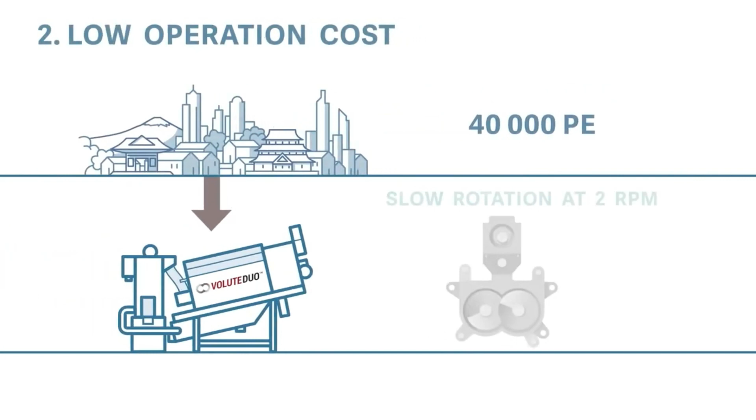Volute consumes the same amount of energy when dewatering sludge from a 40,000 population equivalent wastewater treatment plant as your kettle.

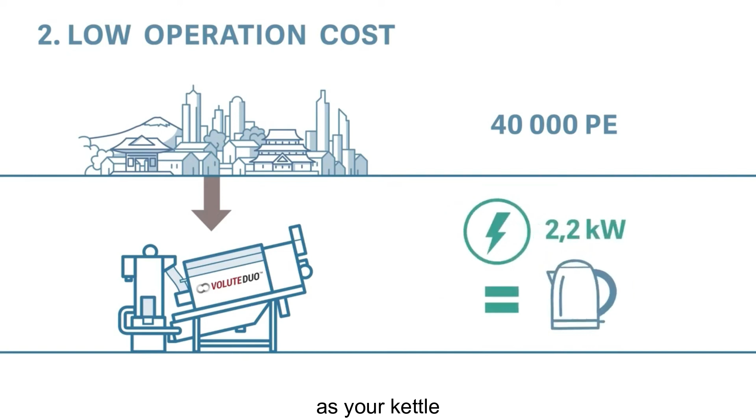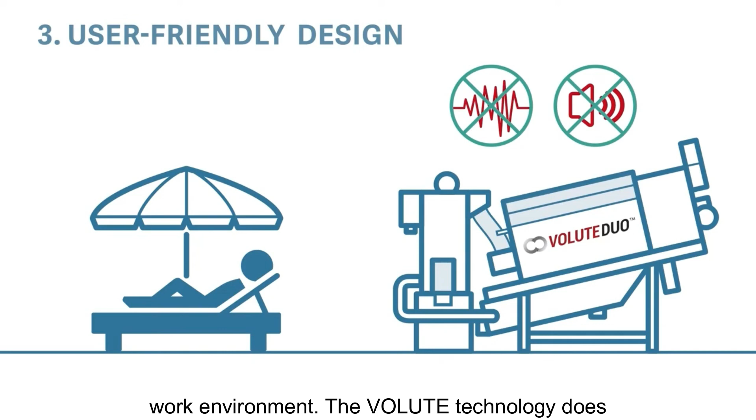A slowly rotating mechanism within the cylinder decreases the noise and vibration levels to a minimum, ensuring a comfortable work environment. The Volute technology does not need any foundations.

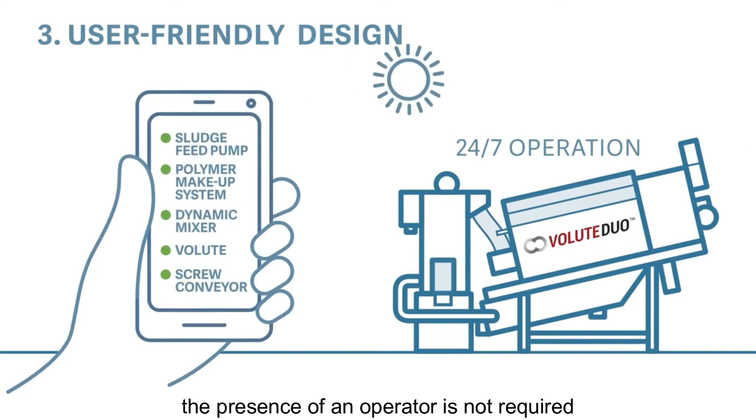Volute is designed for 24/7 operation. The presence of an operator is not required. Furthermore, the advanced technology can be adapted to a remote control and monitoring system so that the operator can check and control the operation of the entire system from anywhere.

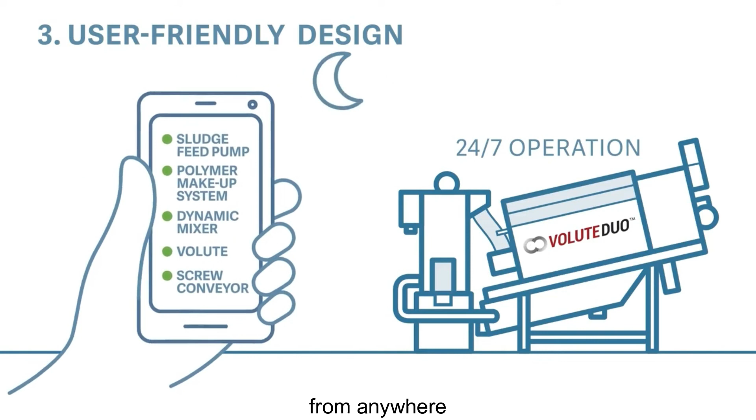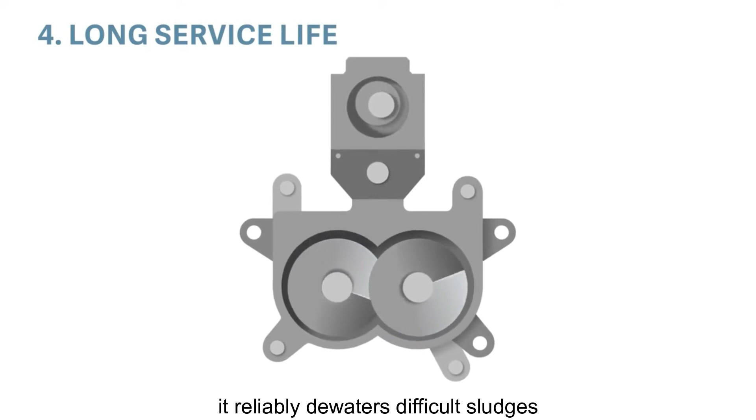Volute technology, namely Volute Duo, provides significantly longer service life thanks to its contactless design. It reliably dewaters difficult sludges with high fiber and inorganic content.

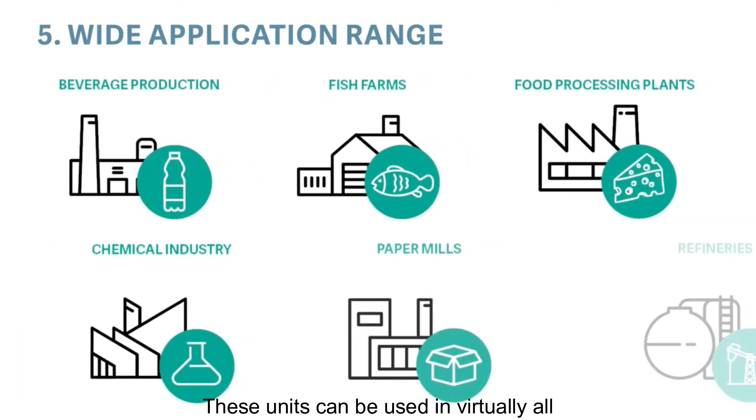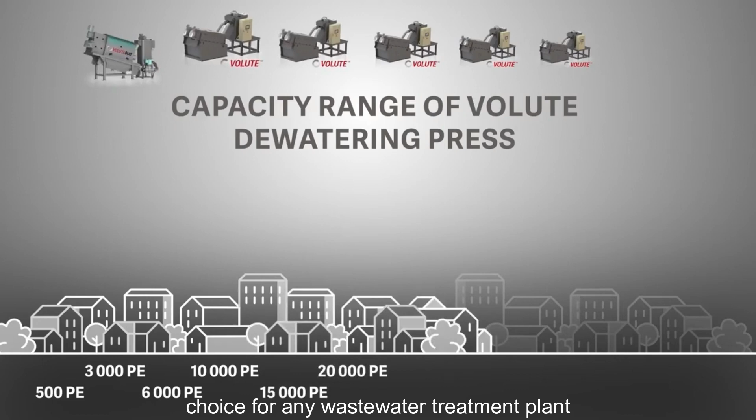The wide application range is another benefit of Volute and Volute Duo. These units can be used in virtually all municipal and industrial applications. Volute has a wide range of product lines, so there is no oversized or undersized choice for any wastewater treatment plant, small or large.

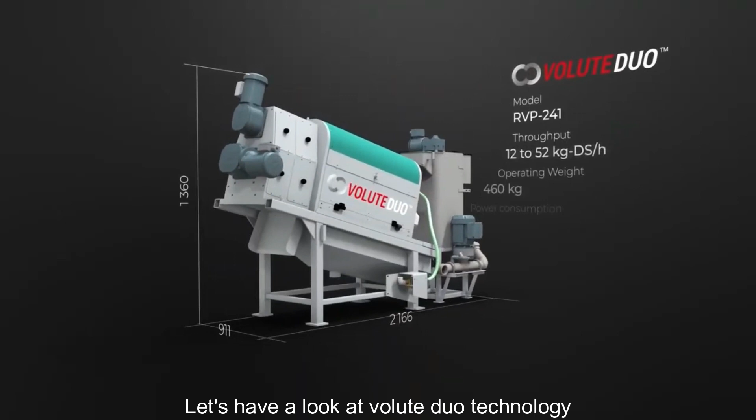Let's have a look at Volute Duo technology. The smallest of this product line, the RVP241 model, can process 12 to 52 kilograms of dry solids per hour.

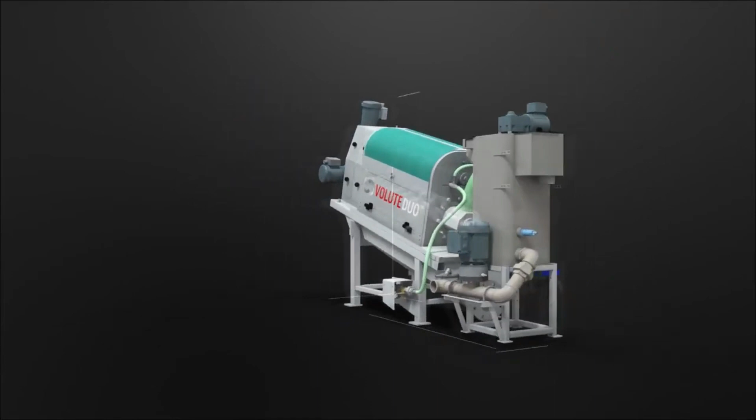Volute Duo introduces the concept of 2 counter-rotating screws in a single filter drum. The screws break up and expose the sludge for thickening and dewatering in a single compact operation.

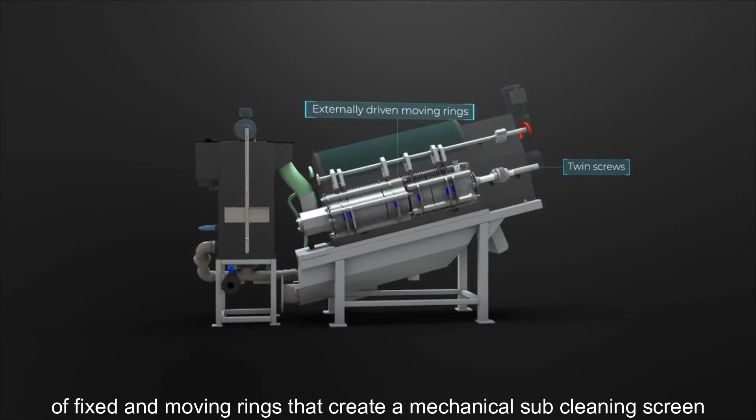The filter drum is constructed of a series of fixed and moving rings that create a mechanical self-cleaning screen to clear the fine gaps between the rings.

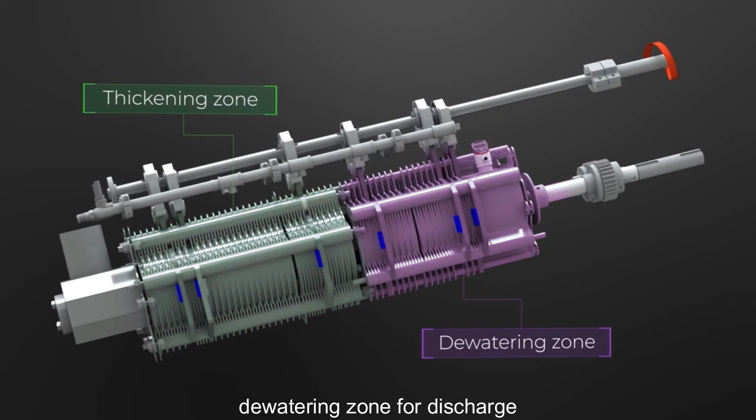The cylinder consists of 2 parts, a thickening and a dewatering zone. The low-speed rotating screws economically transfer the sludge through the filter drum, while the sludge is continuously compressed as it travels through a thickening and then dewatering zone for discharge. The filtrate easily leaves the filter drum.

Now, let's take a look at the sludge dewatering process flow from A to Z.

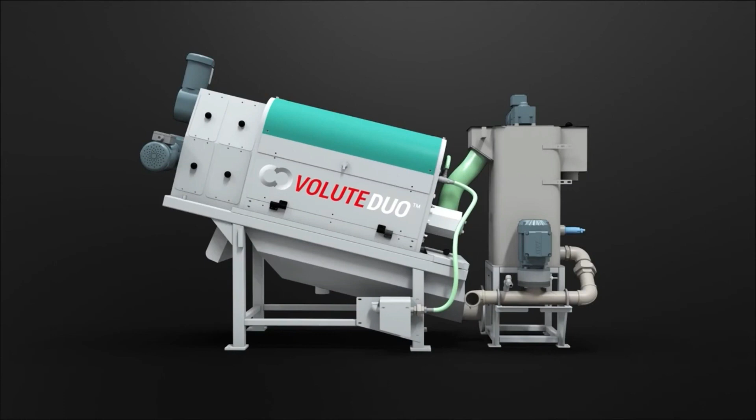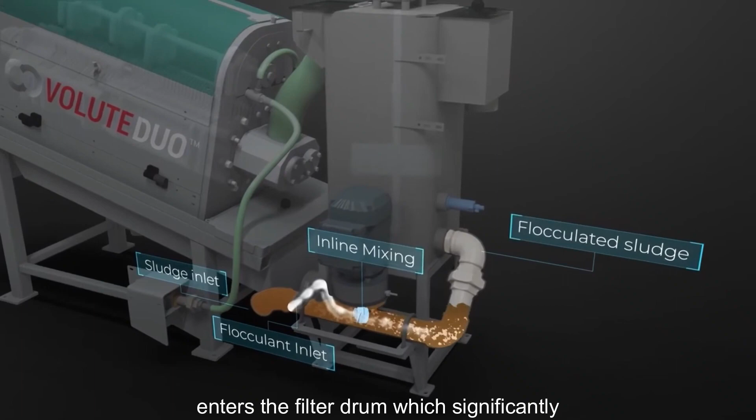The Volute Duo introduces an inline mixer to rapidly mix a flocculant and the inlet sludge before it enters the filter drum, which significantly improves flocculation quality and can reduce the polymer dosage by up to 20%.

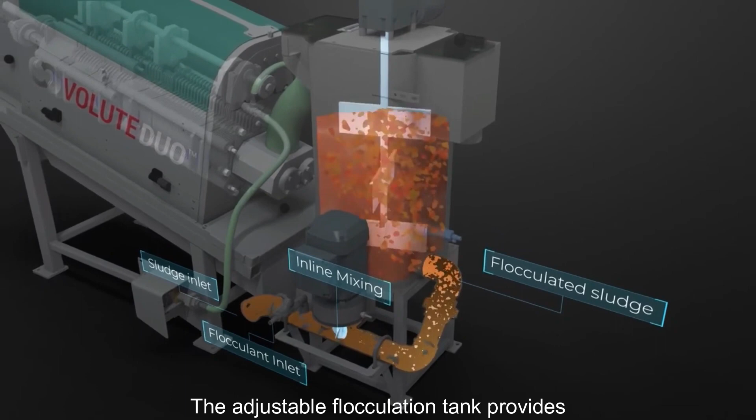The adjustable flocculation tank provides sufficient maturation time for flocculation process completion. Well-flocculated sludge is carried forward to the filter drum.

2 counter-rotating screws inside the cylinder constantly push the sludge forward in the direction of the end plate for discharge.

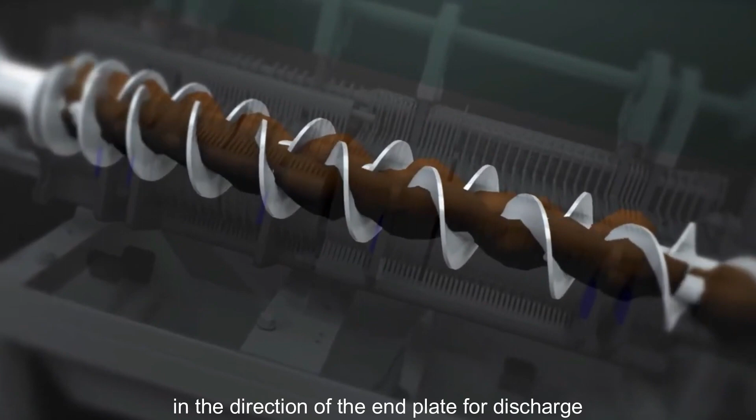Because the moving rings are no longer in contact with the screw flights, thanks to the externally driven shaft, wear is dramatically reduced. The excess solids that can remain on the cylinder surface are washed off at regular intervals.

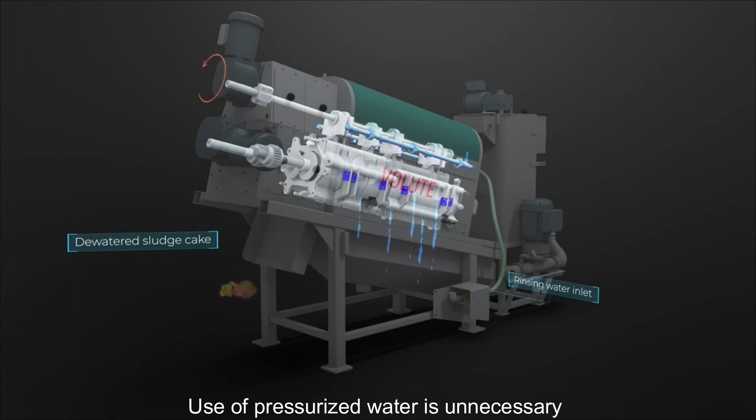The use of pressurized water is unnecessary, as standard tap water pressure is sufficient.

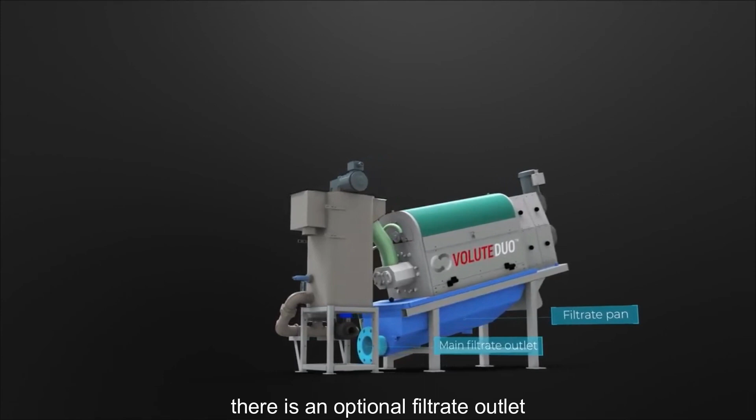In addition to the main filtrate outlet, there is an optional filtrate outlet separating the dewatering zone filtrate from the high quality filtrate coming from the thickening zone.

The Volute technology has been adopted globally and managed to disrupt the status quo of limited options and the complexity of sludge dewatering.

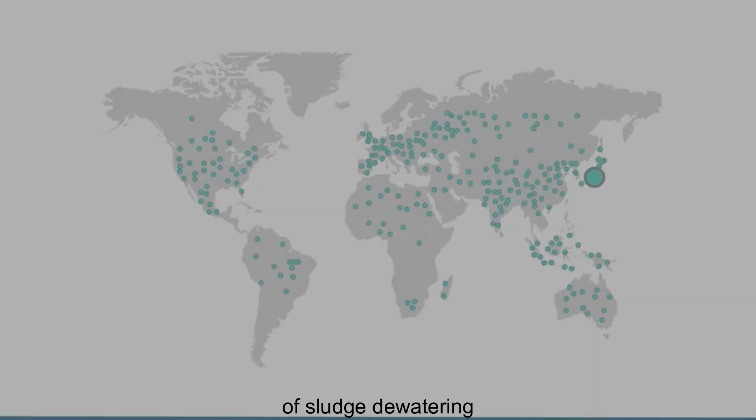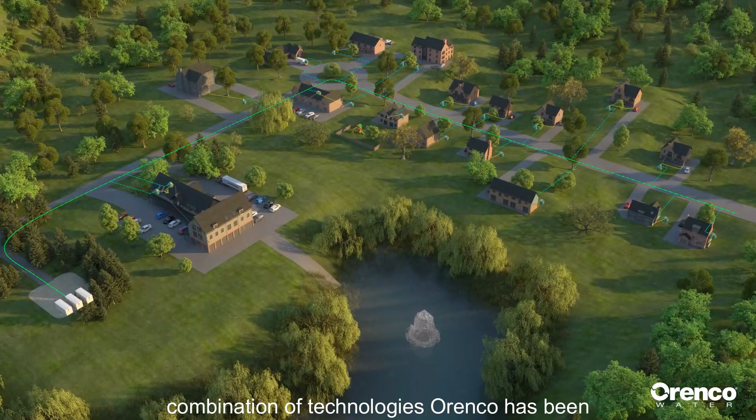Choosing a sewer system is one of the most important decisions a community can make. It's a decision that will affect the community for decades. The Prelos liquid-only sewer system is the culmination of technologies Orenco has been developing and refining since 1981.

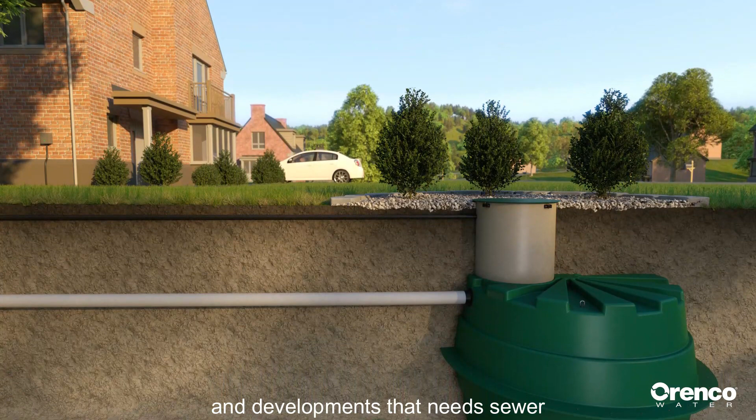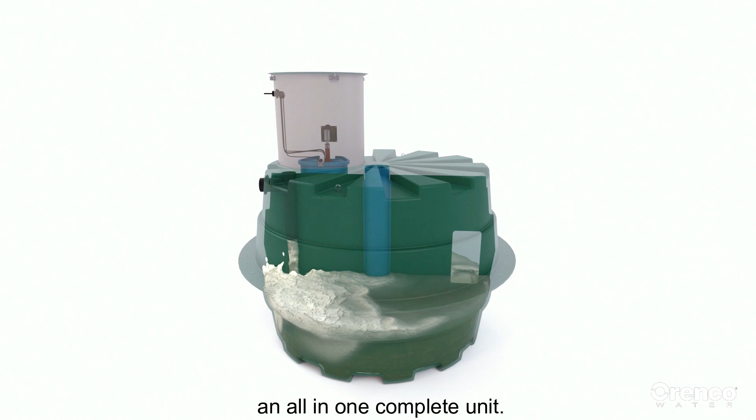Prelos provides an efficient, affordable, and sustainable solution for communities and developments that need sewer infrastructure, whether it's new, an expansion, a repair, or a replacement system. The core of the system is the Prelos processor, an all-in-one complete unit that's easy to specify and install.

It provides primary wastewater treatment and breaks down solids at the source, then pumps liquids to the wastewater plant for final treatment. The 1,000-gallon Prelos processor provides 1 to 4 days of emergency storage capacity.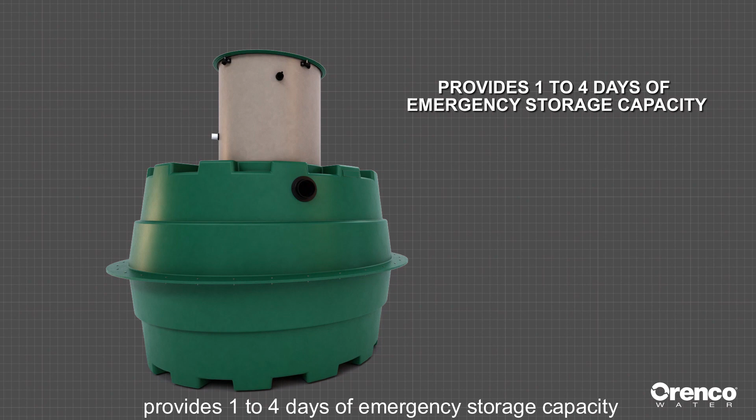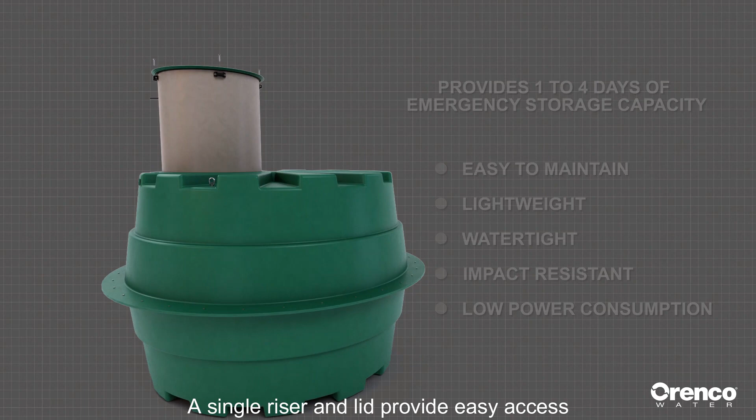It's engineered to be easy to maintain, lightweight, watertight, and impact-resistant, with low power consumption. A single riser and lid provide easy access from the surface to all the components, making it simple to maintain with basic tools and equipment.

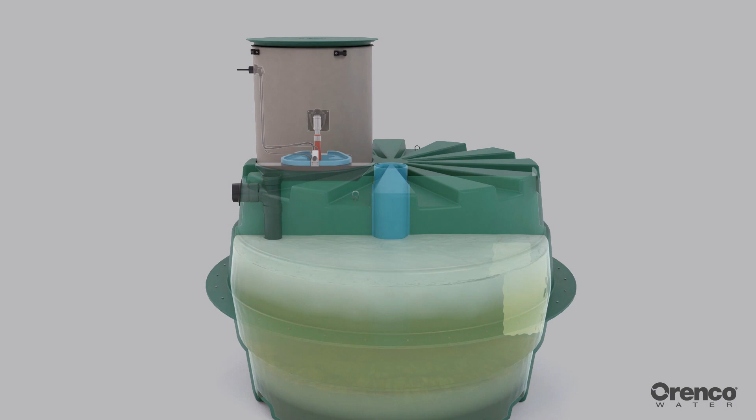Based on decades of proven sewer solutions, the patented Prelos processor tank stores and passively treats solid waste, reducing the volume of biosolids and final treatment costs.

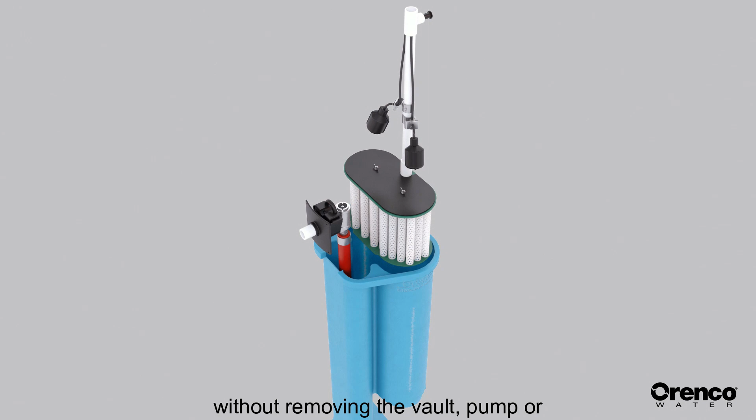Prelos has a passively self-cleaning pump vault with a filter that can be accessed without removing the vault, pump, or discharge assembly, simplifying operation and maintenance while reducing costs.

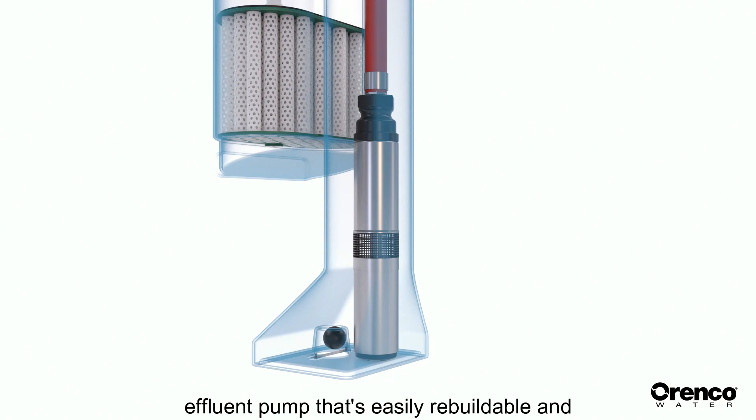The processor also includes a lightweight effluent pump that's easily rebuildable and can last 25 years or more. Orenco's click-tight wiring connection system easily connects the pumps and controls and offers simple serviceability.

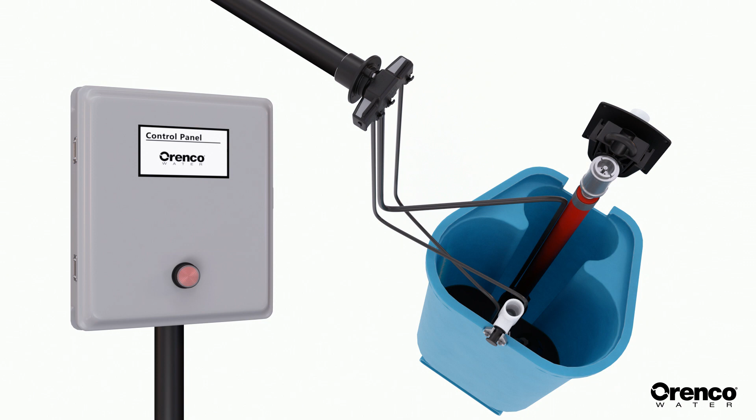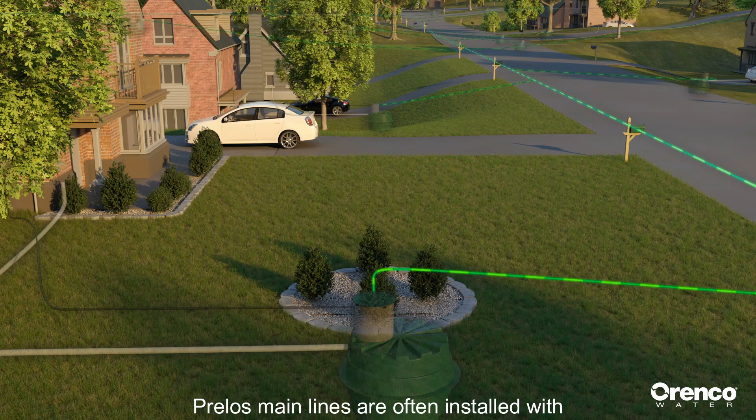The Prelos sewer system uses small-diameter, pressurized, shallow-buried pipes that follow the contour of the land. Prelos main lines are often installed with directional boring, which doesn't require trenching. These main lines can be installed with minimal disturbance to the ecosystem and without disrupting existing businesses, roads, and utilities.

The cost to make Prelos sewer main lines available for connections can be up to 90% less than the cost of gravity sewer main lines.

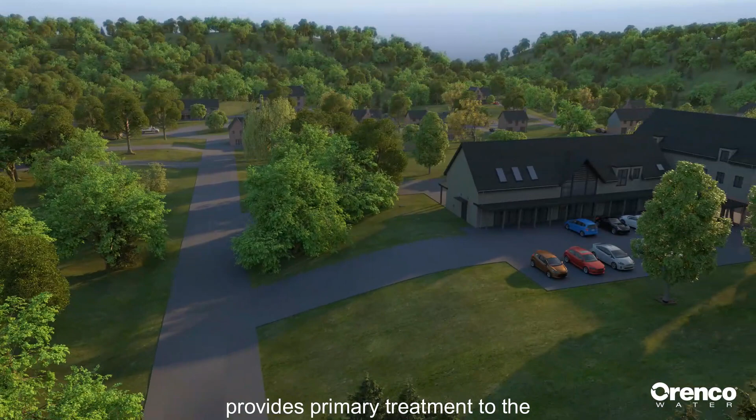Prelos reduces the life cycle costs of wastewater treatment systems because it provides primary treatment to the processor. And while it can be used with any wastewater treatment plant, Prelos works especially well with modular, decentralized treatment plants that can be located at any point in the collection system.

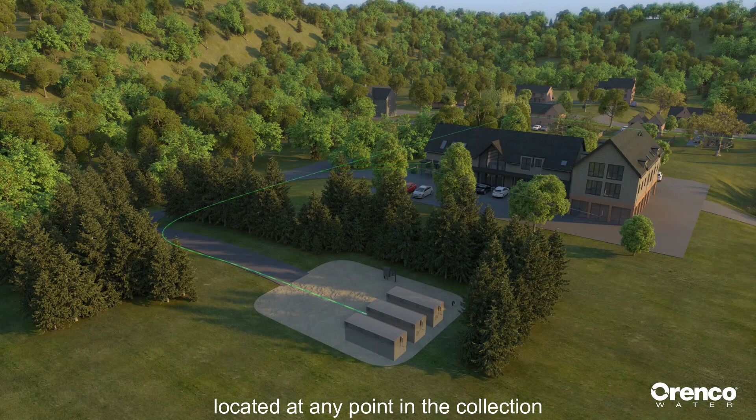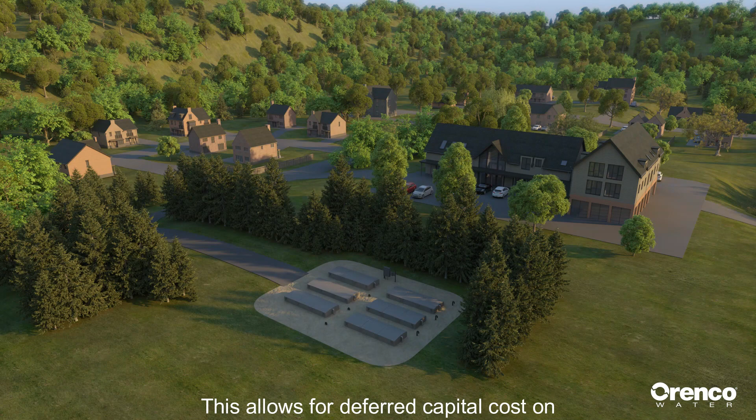Prelos main lines can be used to expand service in an existing sewer system or for new developments that need service most. This allows for deferred capital cost on slow build-out developments, since there's no cost to install or maintain processor units until customers connect.